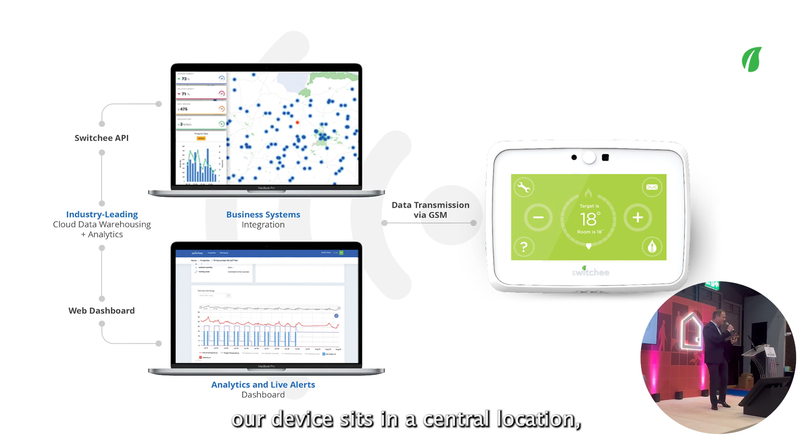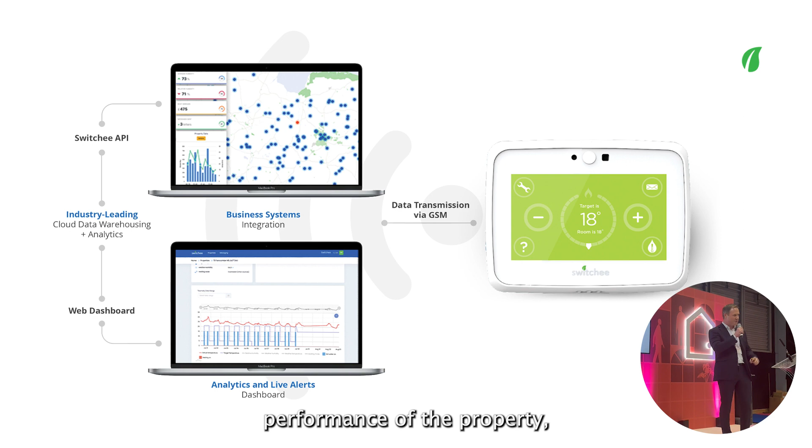So why is that information useful? How does that work? Firstly, our device sits in a central location, typically in a hallway. From a resident perspective, they get a smart thermostat, saving them money on their heating bills, they're thrilled. From a landlord perspective, you understand the true performance of the property and the needs of the resident, and how those two things fit together.

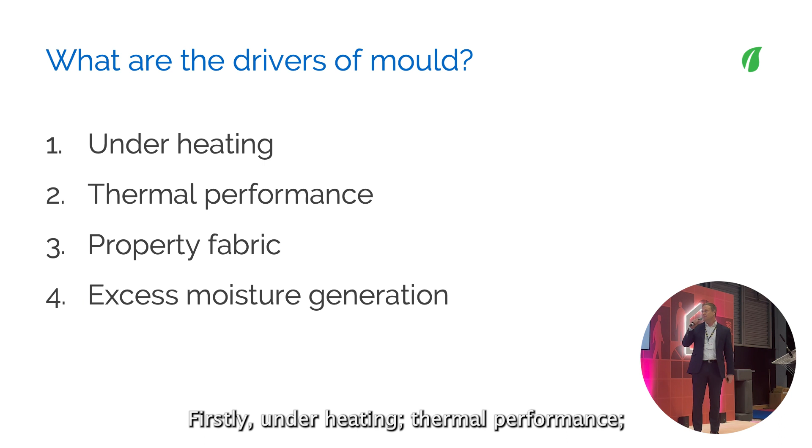So I just want to talk about the fundamentals of damp and mould. Four points I want to run through: firstly, under heating, thermal performance, the property fabric, and excess moisture generation. I want to run through each of those and show you that the data suggests something really quite different from what we expect to see.

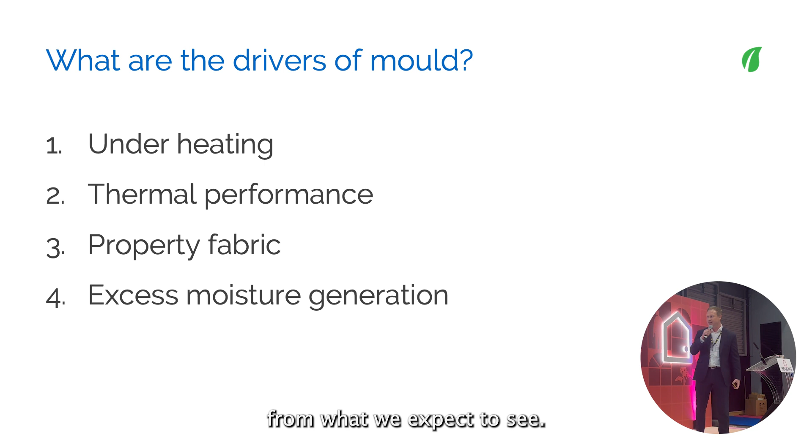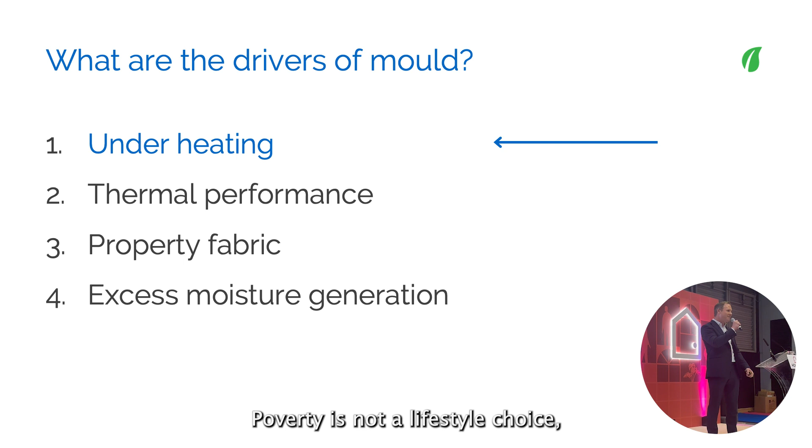So firstly, let's talk about under heating. Now, a clear line from the Ombudsman, and I will come back to it, I totally agree with this: poverty is not a lifestyle choice, and I 100% agree with that, and we'll talk about that. But we cannot ignore the impact of the energy crisis over the last couple of years, because fundamentally, if you cannot afford to heat your home, all your other mould measures, to a point, are largely worthless.

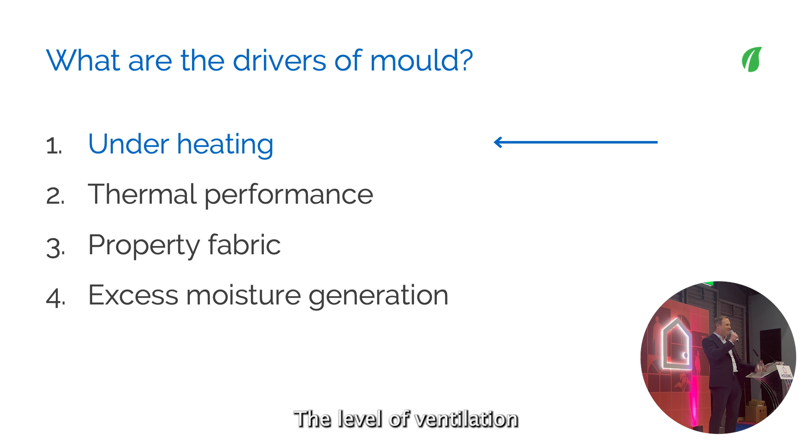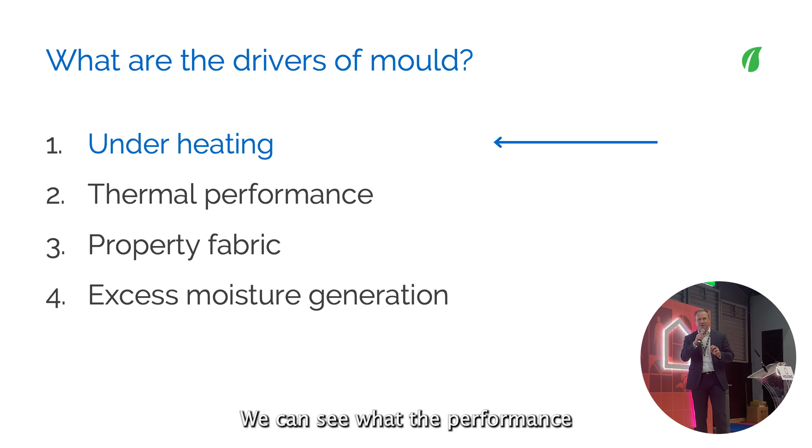The level of ventilation you need in a cold home is knocking on infinite. You don't have the windows open all the time. I just want to give you a feel for quite what the scale is. Now, we're in a privileged position. We can see the performance of all these different thermostats, what people are choosing to do with their money, and what they're choosing to do with their homes.

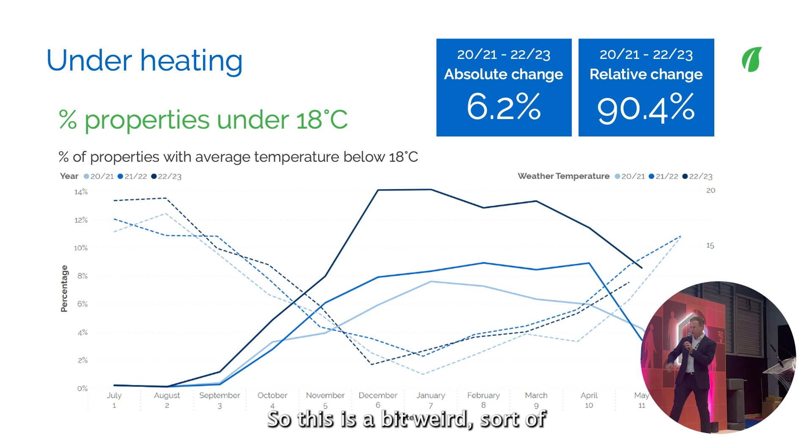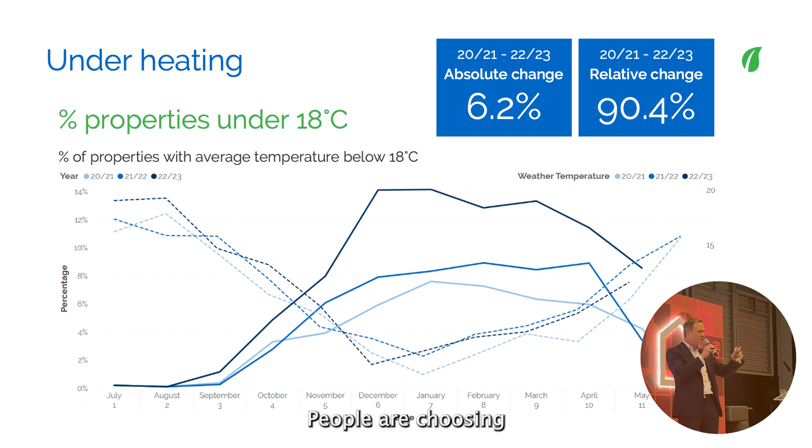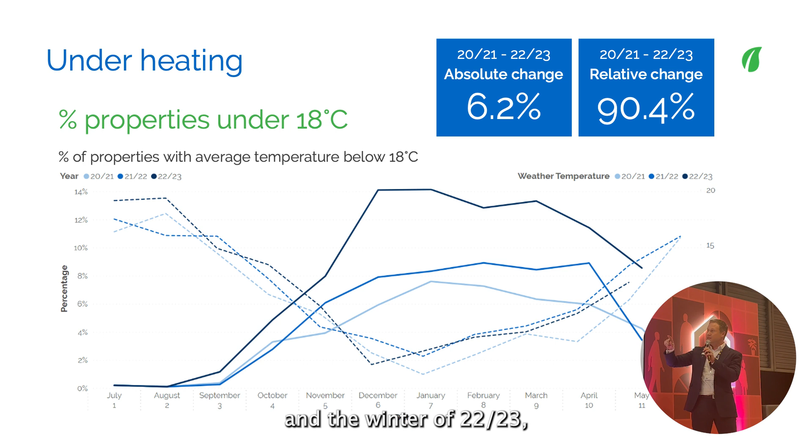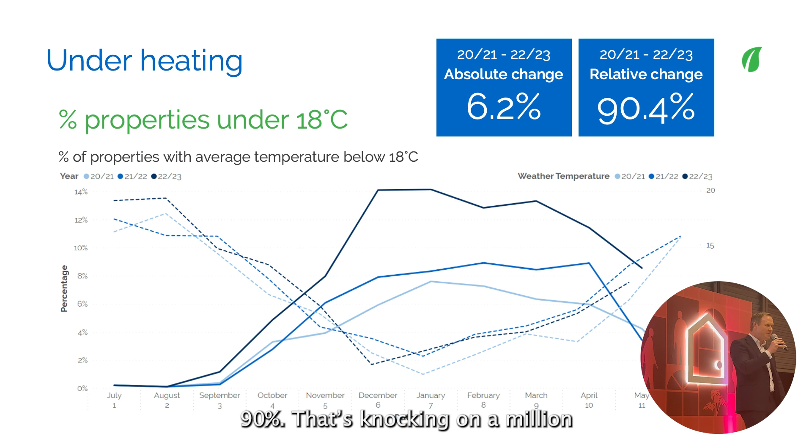So this is winters. It's a bit weird because December's in the middle here, but these are the last 3 winters running across, and these are the properties, potential properties with a temperature of less than 18 degrees, where 18 degrees is the NHS's definition of fuel poverty. Over the last period, the change between the winter of 20-21 and the winter of 22-23, so the last 2 years, the proportion of properties that were under 18 degrees has increased by 90%. That's knocking on 1 million additional homes where they are consistently less than 18 degrees.

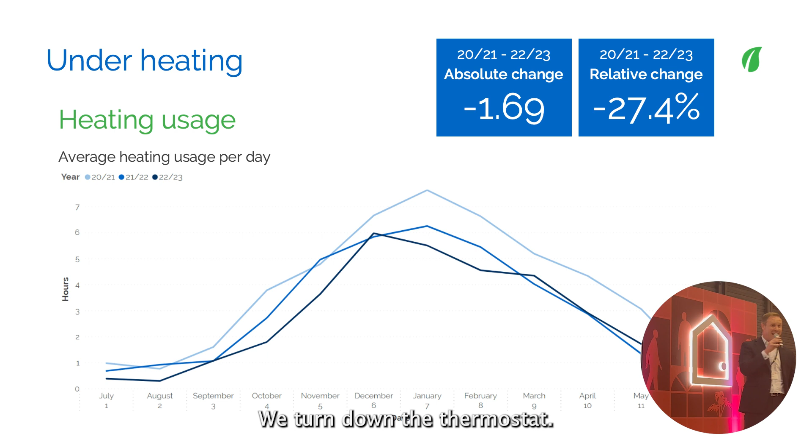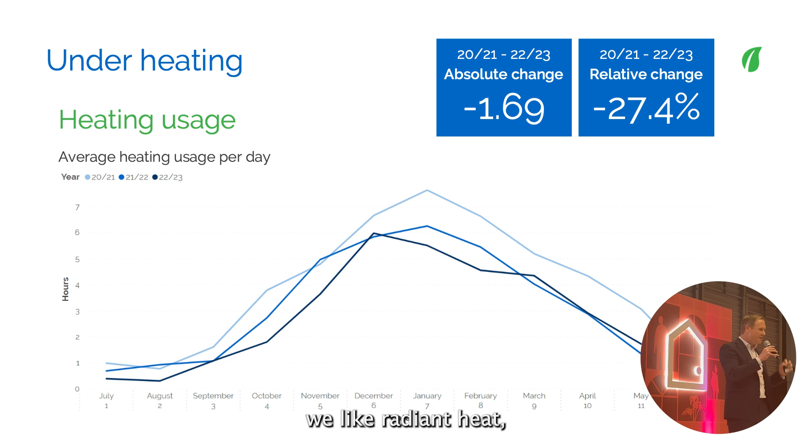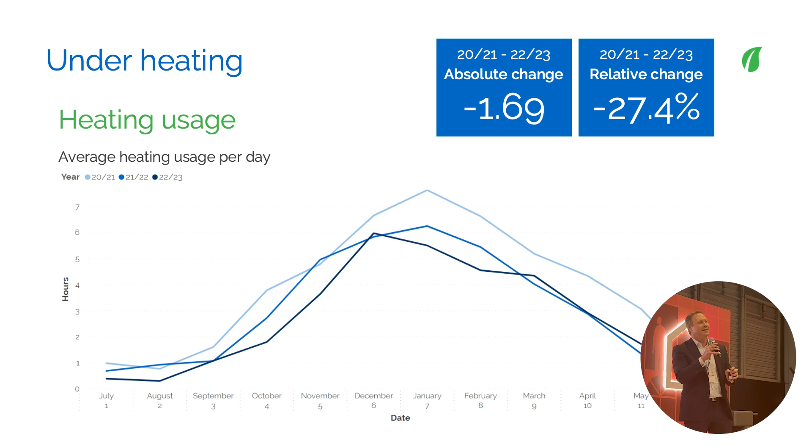And the other thing that we did differently, and I did it, and we see it across everyone else doing it, is that we have our heating on for shorter periods of time. So when you've got a limited budget, we like radiant heat, you want to stand next to a radiator and feel warm. Now the best thing for mould is that you heat your house at a low temperature for a long period of time, and that's not fun, you won't get anything out of that. What you want is that kind of warmth of having the heating on. Having the heating on for short periods of time at a lower temperature is effectively the worst thing you can do for mould, because you're not actually heating the house properly.

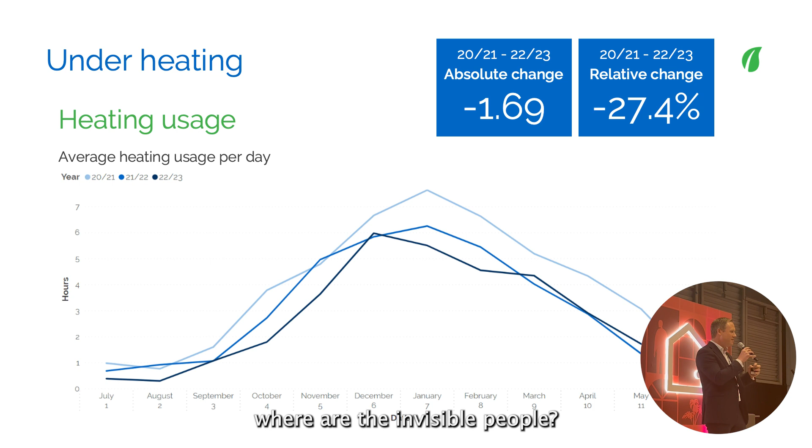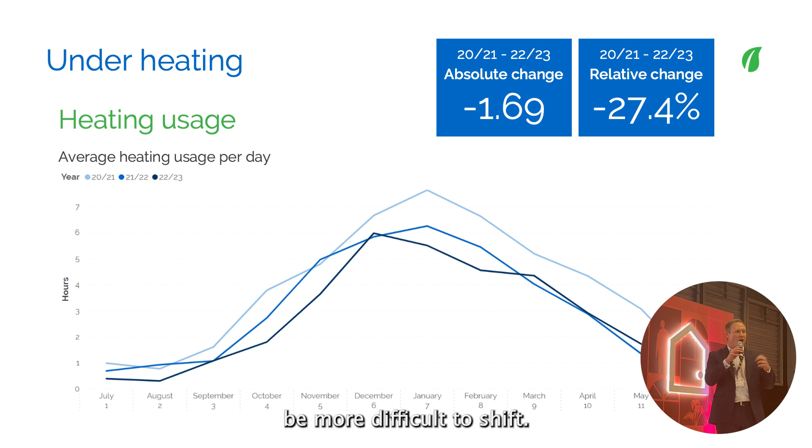One of the challenges we had is you've got to understand where are the invisible people. There's such a strong correlation between people that cannot afford to heat their homes and the impact of mould. Not only are you more likely to get mould, but the mould you get is going to be more difficult to shift. You can go in, you can make massive changes, but if the house was cold before, and you invested a lot of money in mould washes etc., if it's cold afterwards, it is going to come back. These two problems are very much interrelated.

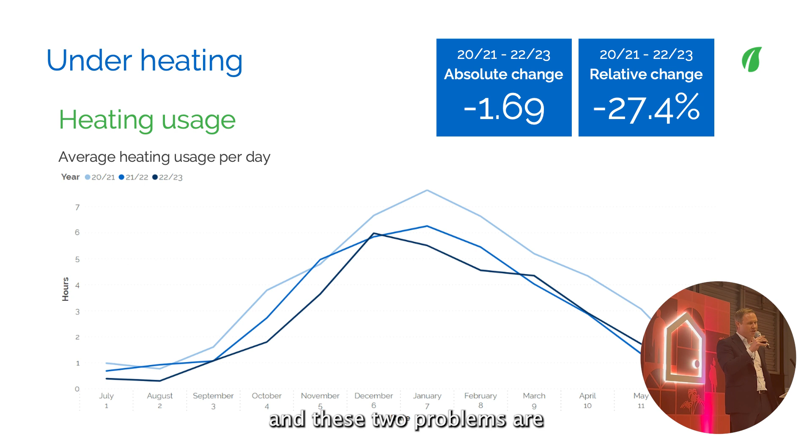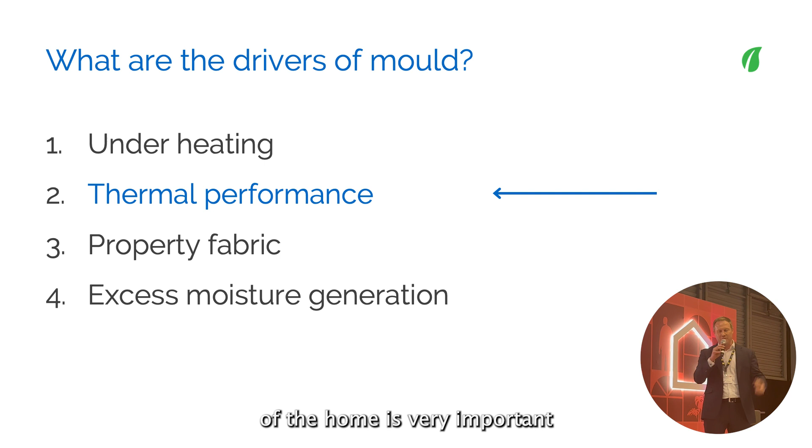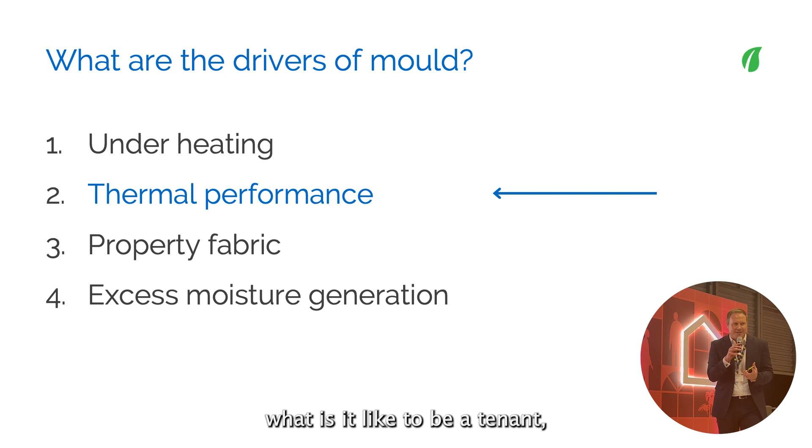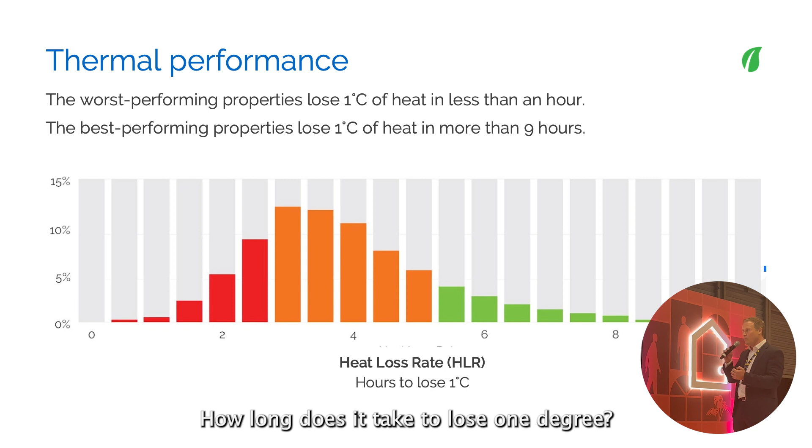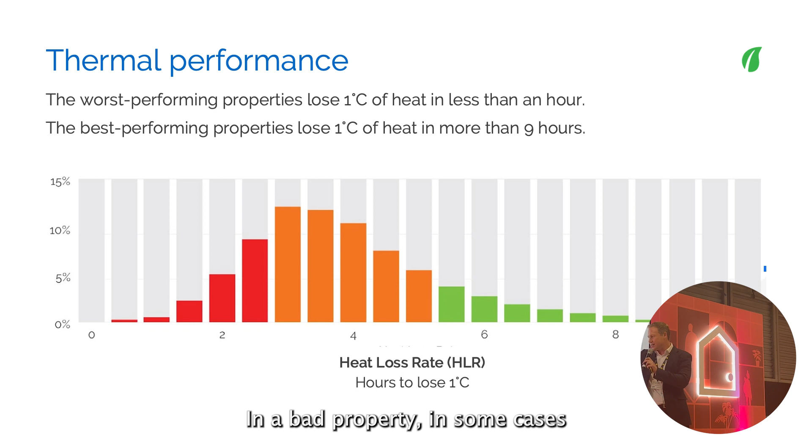So effectively, from the moment you turn your heating off, how long does it take the property to cool down? How long does it take to lose 1 degree? In a good, well-insulated property, it will take a number of hours to lose 1 degree. In a bad property, in some cases, there's a proportion that are well under an hour before they've dropped in temperature. So what we then say is, let's have a look at that against EPC, and what we find is there is little or no correlation between the time to lose heat, the lived experience of tenants, and EPC data.

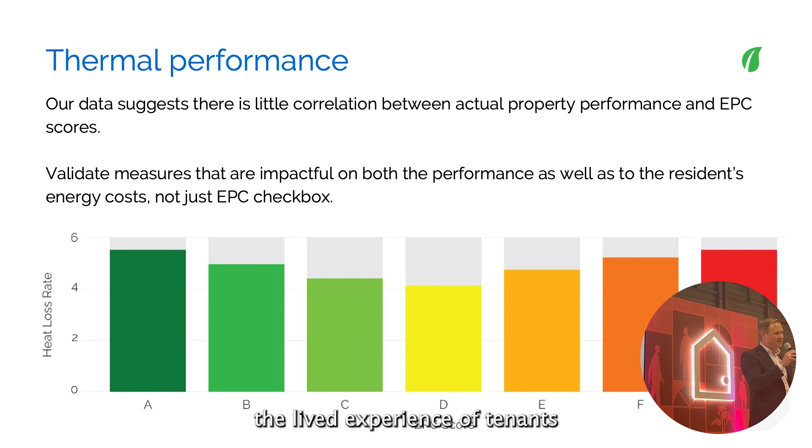That extrapolates to the point that there's some pretty serious questions about the way we're approaching properties and using EPC as a guideline, when the data would suggest the lived experience of tenants doesn't relate to it. So that makes it very challenging. The point I'll build to as a conclusion is we have to understand the individual performance of each property, and the individual requirement of each tenant, in order to put the right resources in the right place. Because if we go by assumptions, we're not going to get there.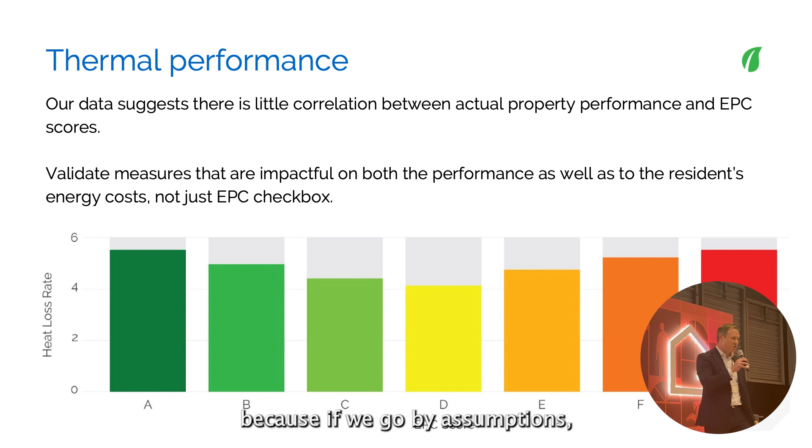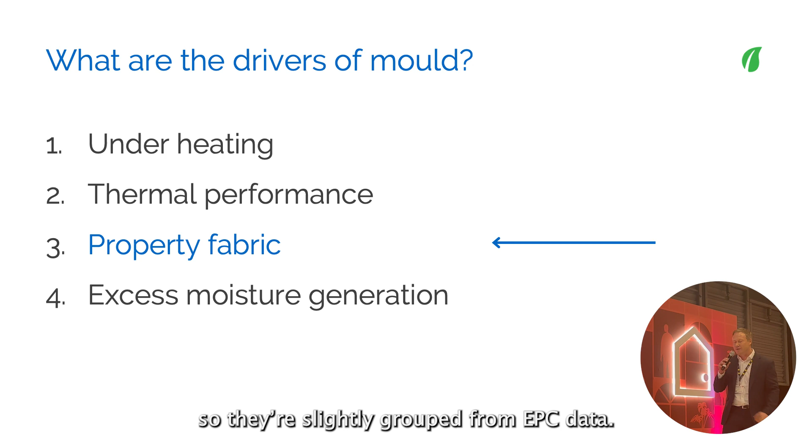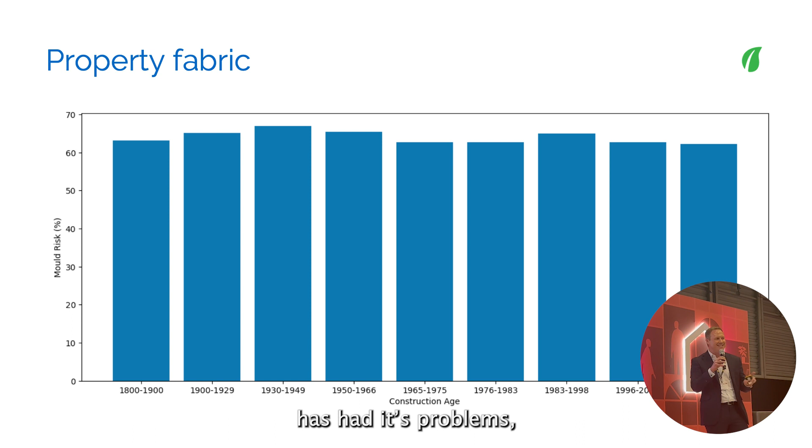Next one then, property fabric. The classic myth is that it's about the age of the property. It's actually not about the age of the property. I just thought I'd chuck up here this propensity for damp and mould versus age of properties. They're slightly grouped by EPC data. There's little or no correlation between the age of the property and the propensity for condensation, damp and mould. Every generation of property has had its problems - different generations at different times. But to go and say there was a particular group, like Victorian properties, is just not true.

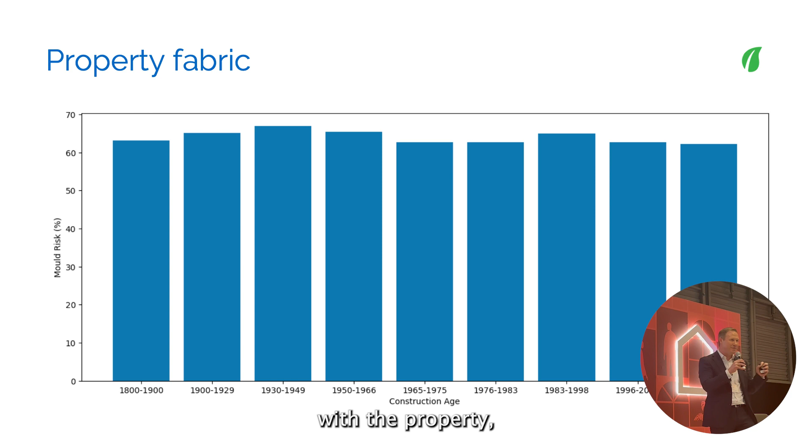The data that comes back shows that lifestyle is a much more dominating factor. The way people are interacting with the property, and their ability to heat their home, is much more powerful than focusing on any particular group of properties.

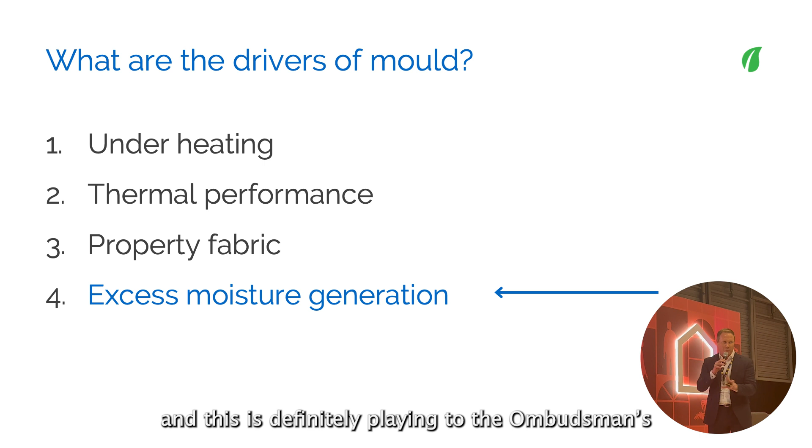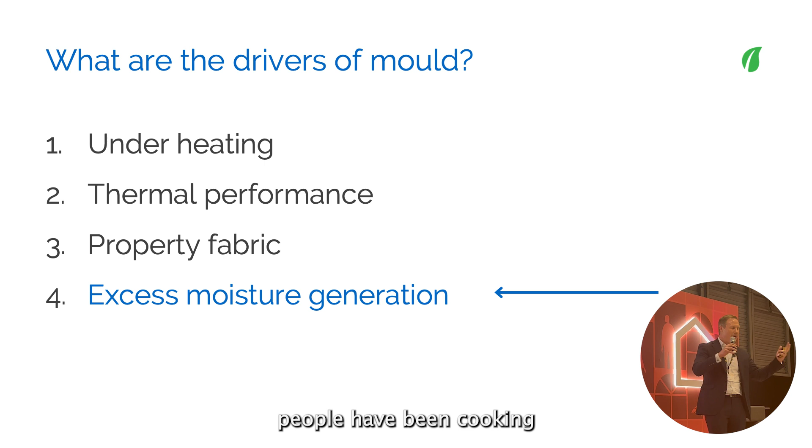The last thing I want to cover is excess moisture generation. This definitely plays to the Ombudsman's point that poverty isn't a lifestyle choice. A lot of the data shows particular behaviours - we'll see when people have been cooking or having long showers, and you can see the moisture created in a short period of time, and the impact of that. The big word of warning here, having engaged with thousands of properties across the UK, is that consistently the measures in the property designed for natural ventilation aren't performing as they were originally designed to.

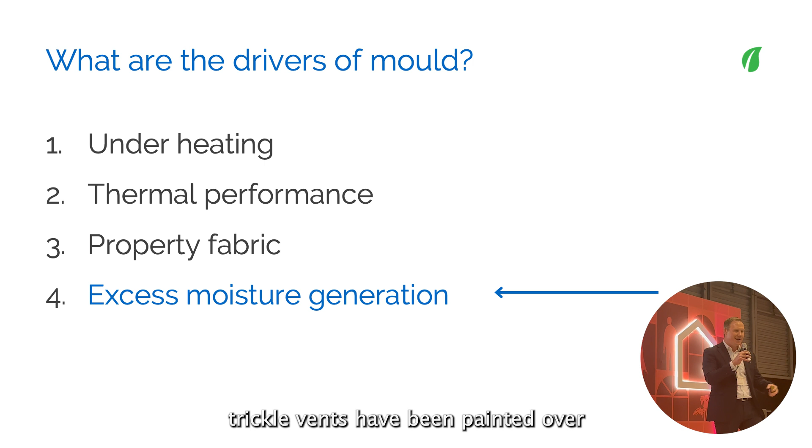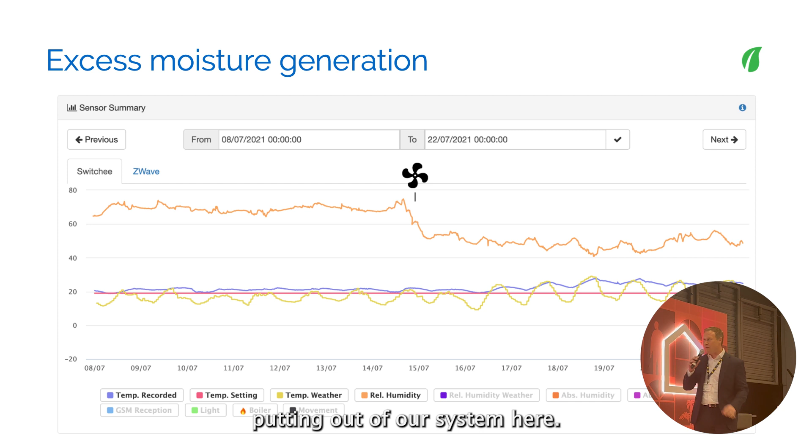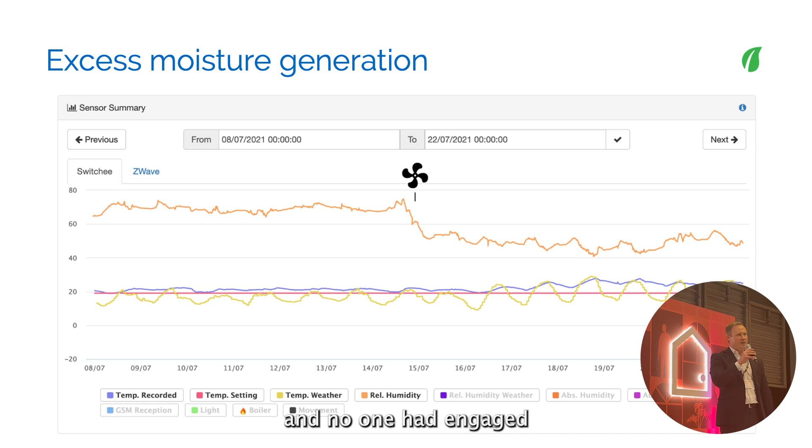Whether that's trickle vents painted over - not by the tenant - or an extractor fan taped over, or the fuse has gone. I want to give you a really simple example of the data our system produces. On the orange line running along the top here is humidity, highlighting humidity into the mid 70%. The only difference here was changing the fuse on the extractor fan - right, that was it. All the measures were there, they just weren't working, and no one had engaged with it, assuming it was the fault of the tenant creating too much moisture in the property. So a big challenge there.

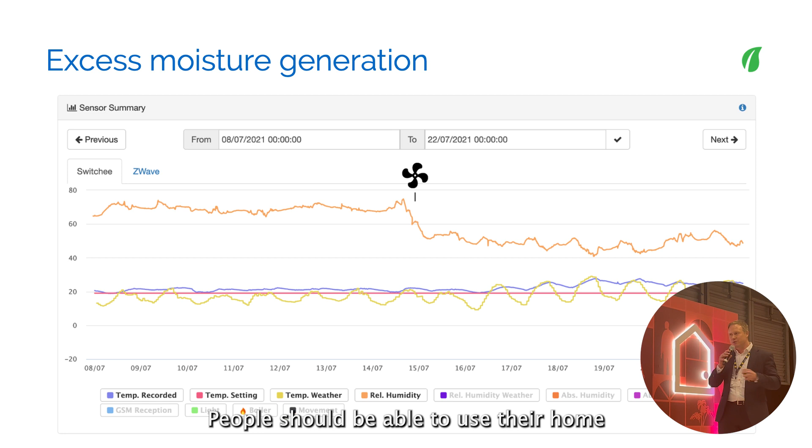Poverty is not a lifestyle choice. People should be able to use their home as a home, and we should just check that the measures originally designed into the property are functioning as we would expect.

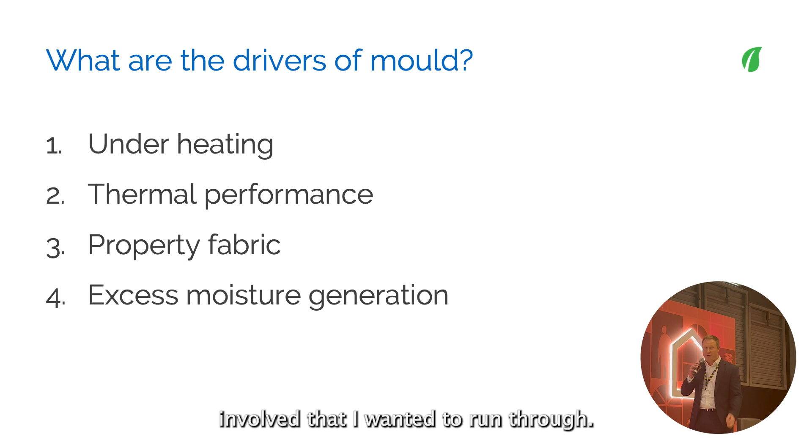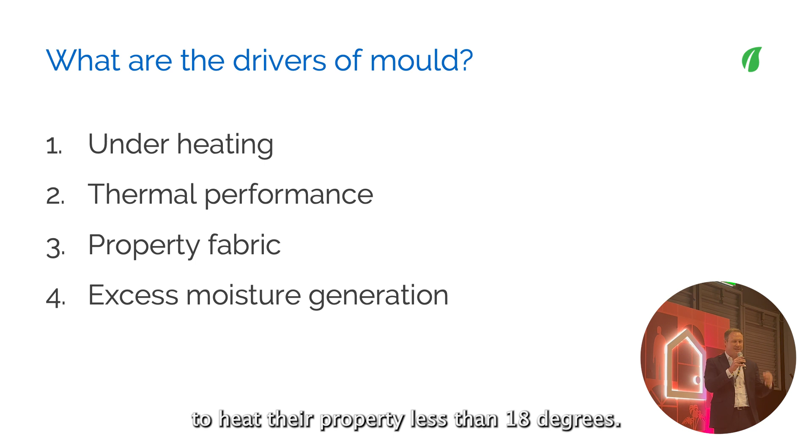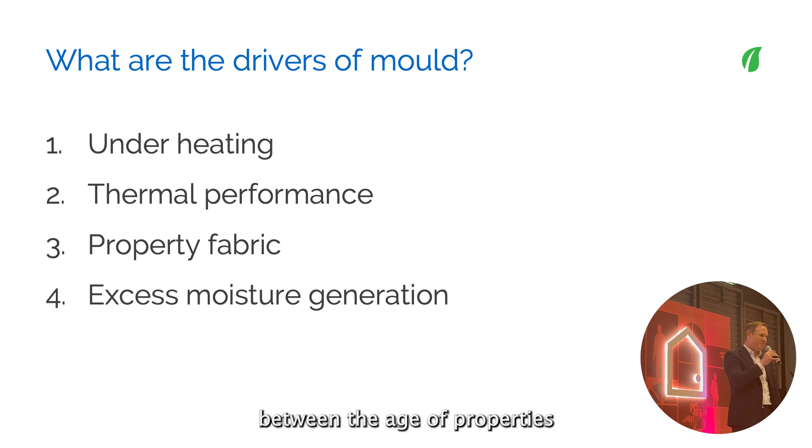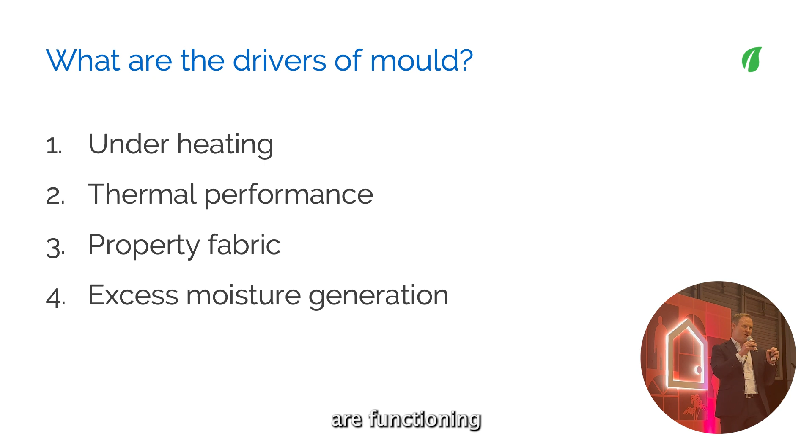So those are the 4 drivers of mould I wanted to run through. Underheating - do not underestimate the impact of the fuel crisis last winter, it was huge; 1 million more social homes are choosing to heat their property less than 18 degrees. Thermal performance - there's arguably no correlation between EPC and the lived experience of tenants. Property fabric - there's no correlation between the age of properties and the propensity for condensation, damp and mould. And finally, on excess moisture generation, people have the right to live in their homes - it's always worth checking the measures designed into the property are functioning before blaming the tenant for their behavioural choices.